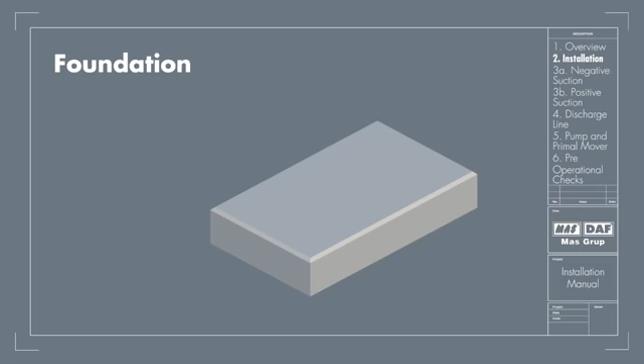Installation. Before installing the pump, ensure that the foundation on which the pump will be installed is prepared well. It has to be sufficient enough to take the weight of the pump and absorb any possible vibrations from it. The foundation has to be absolutely straight without any inclination. The foundation bolt of proper size should be embedded in the concrete and base plate.

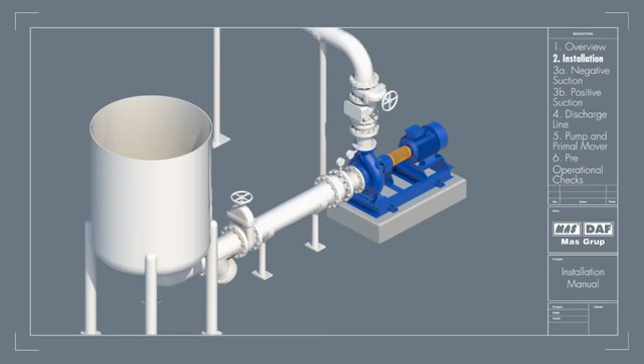Piping associated with the pump must be supported independently of the pump and should never put any strain on the pump casing. When the pipes are not supported, their weight is carried by the pump casing, and this situation may cause cracks on the pump casing. It's important that the connections are aligned axially, angularly, and in length carefully.

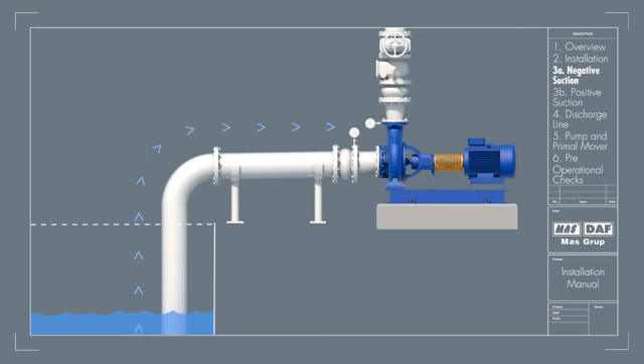Suction line, negative suction. The piping and the connection fittings should be properly aligned and supported separately. The elbow should be of long radius type. All suction piping must be airtight. The suction pipe should be sized to ensure a liquid velocity of not more than 2 meters per second. The suction pipe's size should be at least one commercial size larger than the pump inlet.

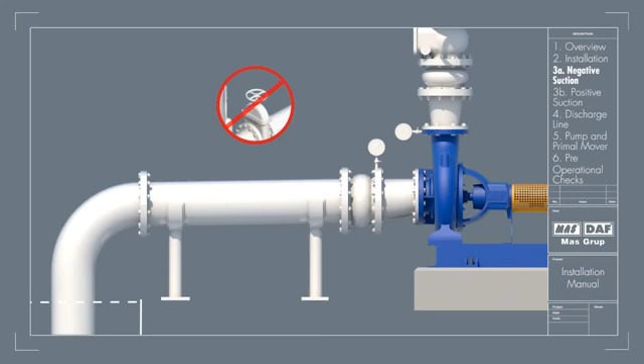All suction pipes should have a continuous rise to the pump suction inlet. 6 mm to 100 mm slope is recommended. No isolation valve is recommended. There should be a pressure tapping provided for installing a vacuum gauge in the suction line.

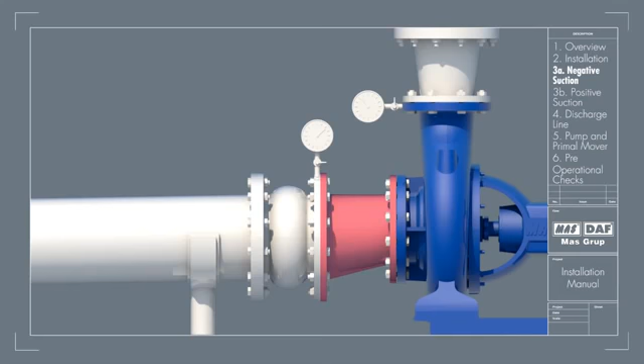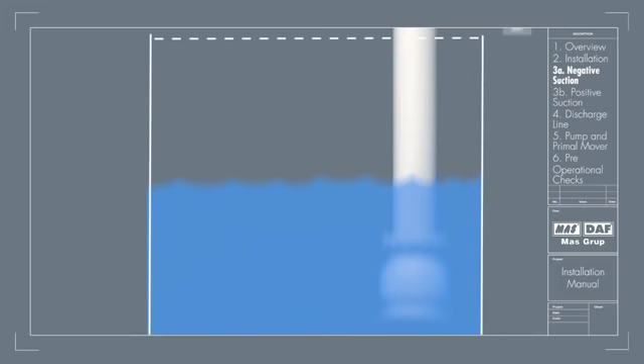The reducer joining the straight length of the pipe in the pump line should be an eccentric reducer with the inclined side of the reducer as the bottom side. The straight length of the pipe after the eccentric reducer should be 2 times the pipe diameter. The suction strainer must be at least 4 times the suction pipe area, and the mesh size should screen out solid particles that would clog the impeller.

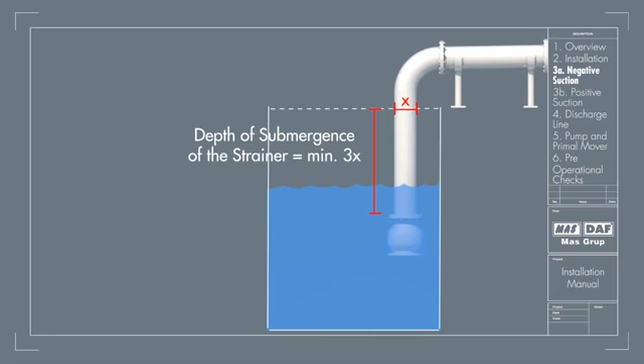The minimum depth of submergence of the strainer should be at least 3 times the pipe diameter measured from the upper row of holes of the strainer. The distance between the bottom of the strainer and the floor of the tank should be 2 times the pipe diameter.

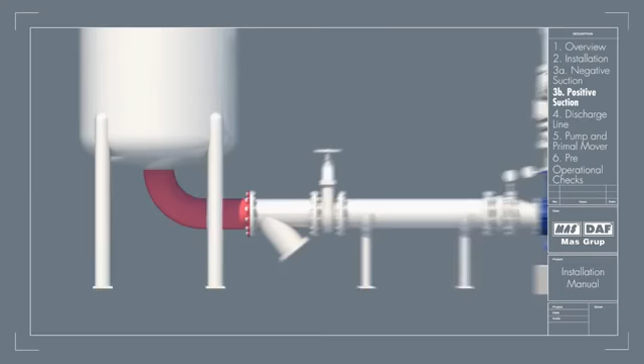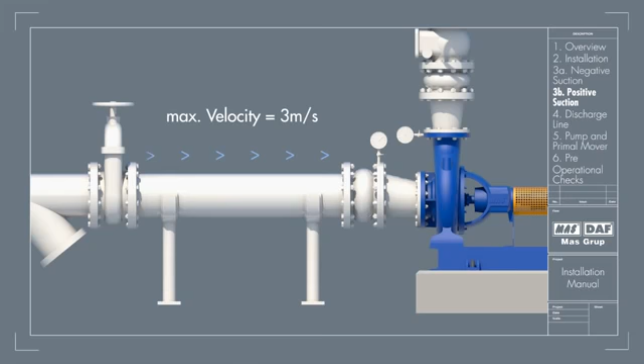Suction line, positive suction. In case the water is being supplied to the suction through gravity, a slightly different setup is needed. The elbow should be standard type or long radius type. An isolation valve should be provided in the suction line. The pipe from the tank to the pump should have a descending inclination. The straight length of pipe between the pump inlet and tank should be at least 3 to 6 times the pipe diameter. The suction pipe should be sized to ensure a max liquid velocity of 3 meters per second.

There should be a pressure tapping provided for installing a vacuum gauge in the suction line. The reducer joining the straight length of the pipe in the pump line should be an eccentric reducer with the inclined side of the reducer as the top side.

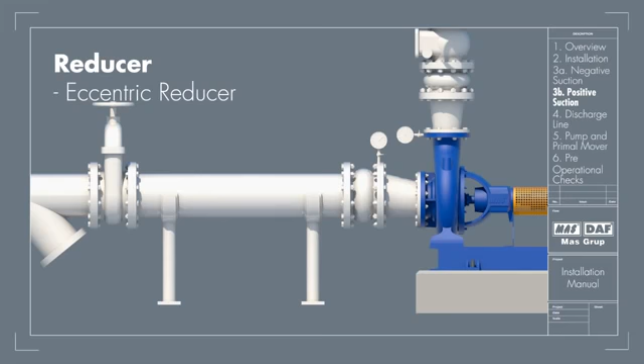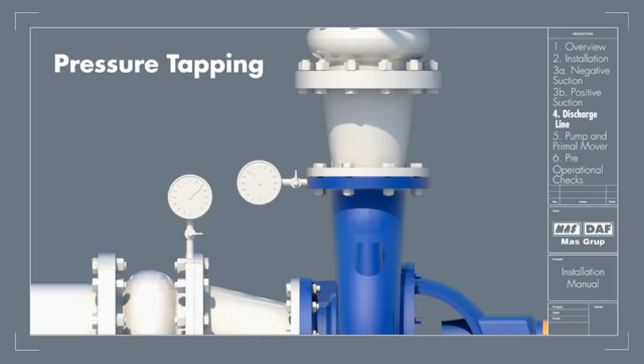Discharge line. There should be a pressure tapping as close to the pump outlet and before the isolation valve as possible to measure the pump shutoff head. A concentric reducer is installed on the discharge side to minimize the friction losses. To prevent reverse flow and protect the pump from hydraulic shocks, a check valve has to be used in the discharge line.

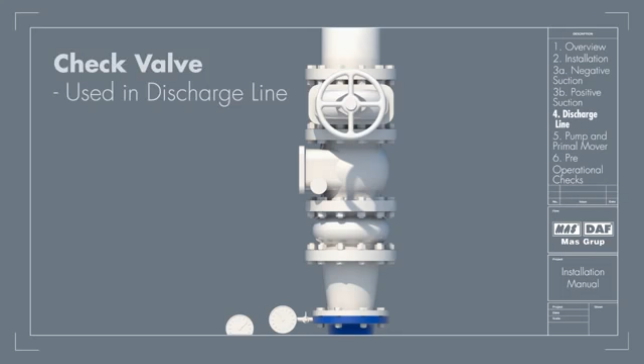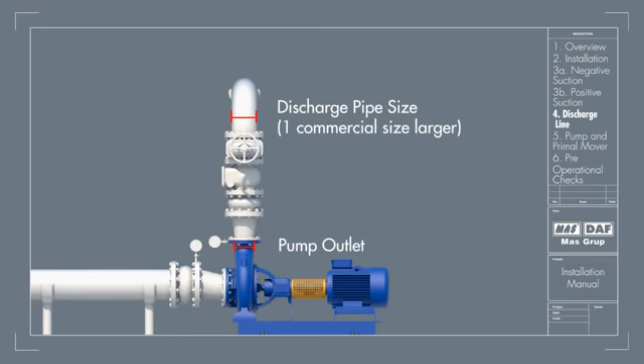The isolation valve is provided downstream of the check valve so that these can be taken up for maintenance, priming, and starting whenever required. Discharge pipe size should be at least 1 commercial size larger than the opening of the pump outlet. The number of fittings and size changes should be minimized to prevent fluid friction losses. An expansion joint may be used only after a careful piping analysis, especially when the discharge pressures are on the higher side.

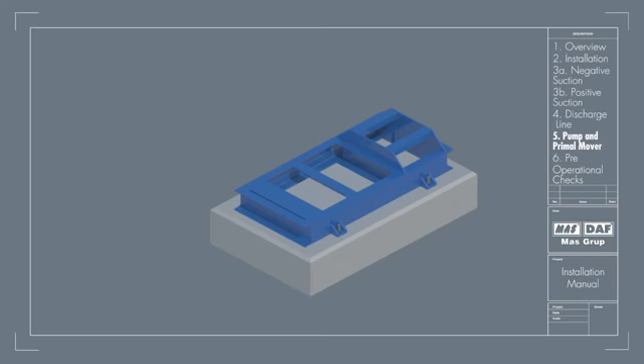Installation of pump and prime mover. The pump unit needs to be fitted using nuts and bolts before fitting in any pipes. The pump and the motor are aligned to the final tolerance using a reverse dial gauge or laser alignment tool. After the alignment is completed, the piping connected with the pump should be built. Once this is completed, the alignment of the coupling should be rechecked.

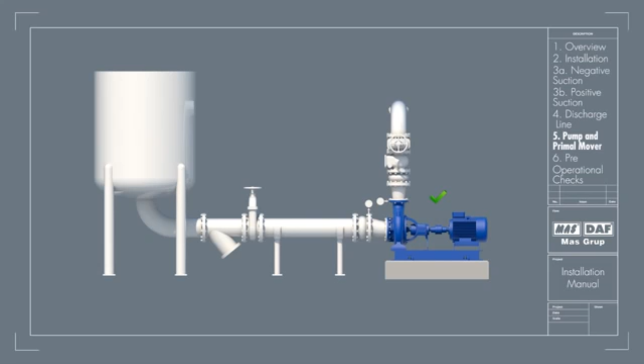Then the alignment of all piping and fittings should be rechecked and suitable corrections should be made. The motor should be wired correctly to ensure the correct direction of rotation. When the pump and motor have been coupled, the shafts should be rotated manually by hand to see if they are rotating smoothly.

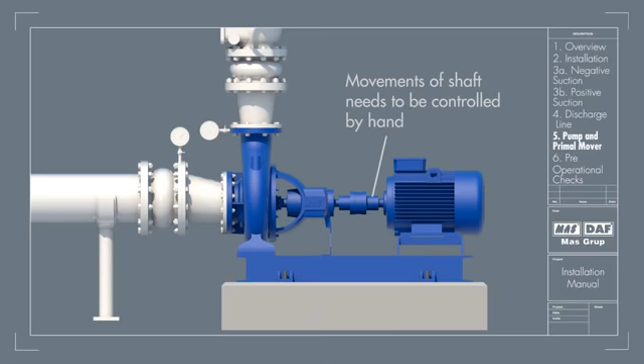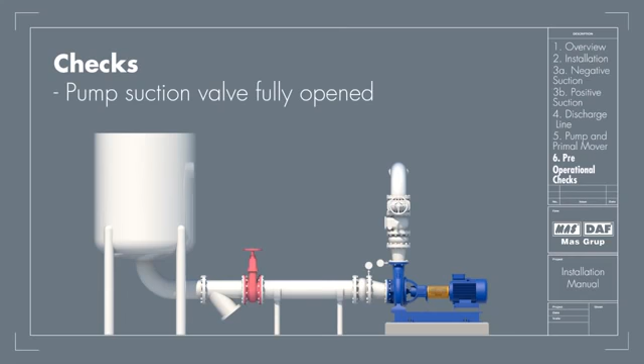Pre-operational checks. After checking alignment of the coupling, assemble the coupling guard and tighten the bolts. Ensure that the pump suction valve is fully open and all joints are checked for any leakage. The discharge valve should be kept closed to prevent overloading the prime mover.